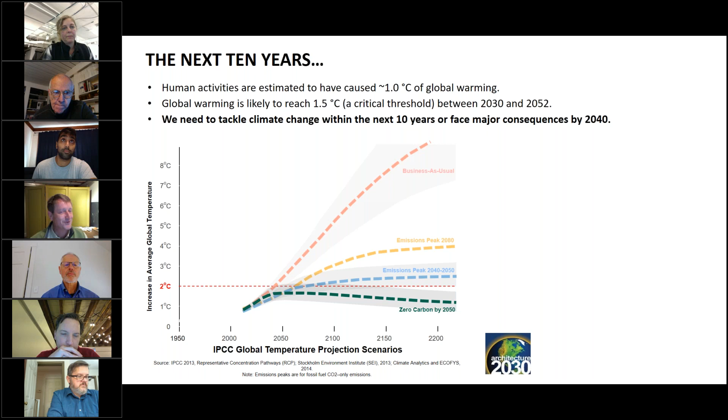So it's important, and I think too, just what the AIA is doing in general, if you're not paying attention, there has been a huge shift in terms of every aspect of the AIA now being about trying to support this big design problem, which is really being part of the solution for climate and carbon reduction and creating a sustainable, healthy, equitable world together.

So just a call out to the AIA—I'm very pleased to be an FAIA in my case, but just absolutely, when an organization makes such a big shift for such importance, anyway, I'm just hats off to that effort, and all of us should support them.

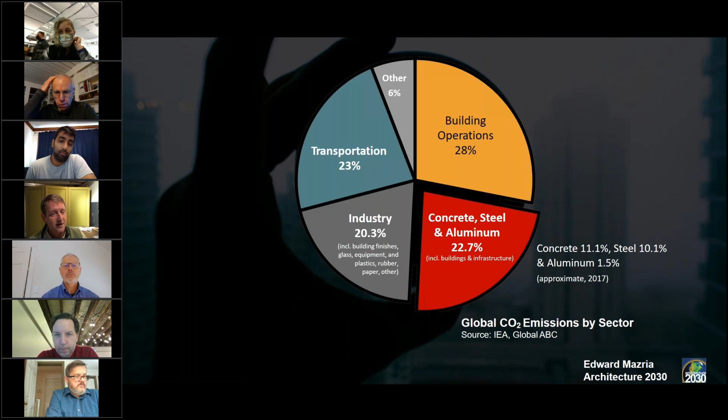So why are they doing that? Obviously buildings, we know the impact on the environment, but today it's trying to shift towards mass timber. We know there are materials out there that we're using more often and too much of, and are we balancing the quantities? When you start really drilling into the CO2 emissions versus maybe energy—we used to always think about the energy performance of buildings, but when we start bringing in CO2 emissions, it really drills into this topic of materials.

And so I think we're getting better. I know we're getting better on the operational carbon, right? We're getting to the point of net positive energy buildings. That's way cool, right? But we're not there yet. We've got a lot of work to do. But the embodied carbon of the materials is now the thing we have to also embrace.

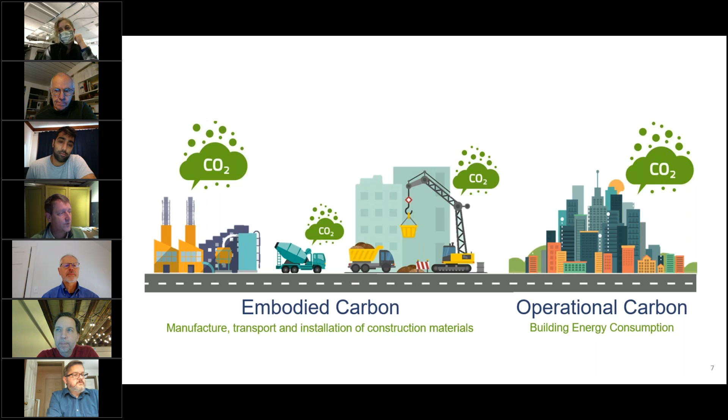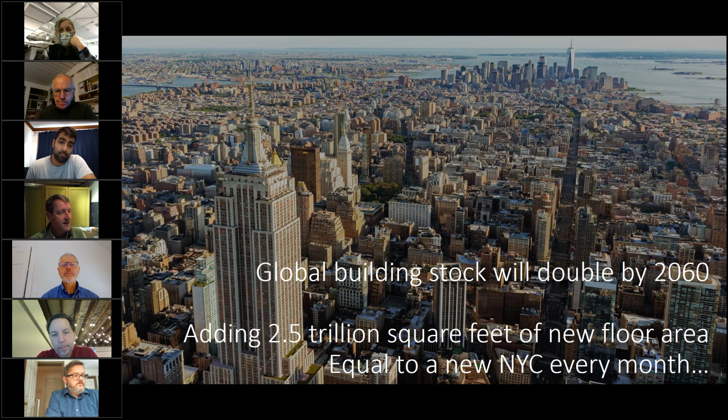So we can't let go of operational carbon—we have to do both. It really comes into where are the materials coming from, how are they manufactured, and are we being smart about how we're using them for our buildings. When you start looking at this global stock advancing, and obviously COVID's throwing us off a little bit on how quick we're going to be building new buildings versus retrofitting, as we look globally and many cities still advancing, we need to pay attention to the embodied carbon.

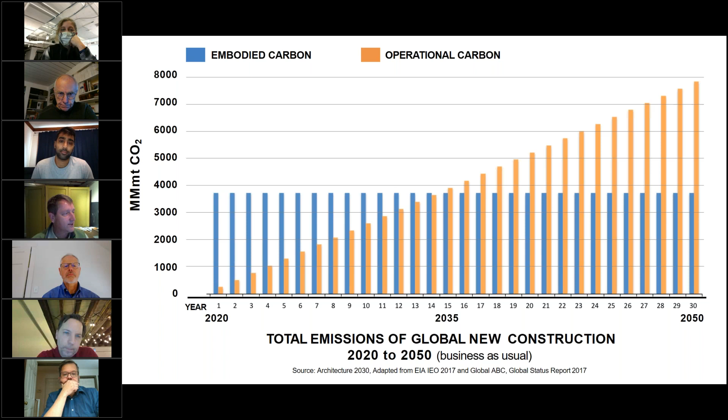This is a graph some of you may have seen before, but it's just showing—left to right along the bottom is years, and on the left vertical are tons of CO2, megatons. When you start taking that many billions of square feet that are being built, it's really—we want to think not just of this operational carbon, which progresses as we get that square footage, billions each year, advancing and impacting in terms of climate energy usage.

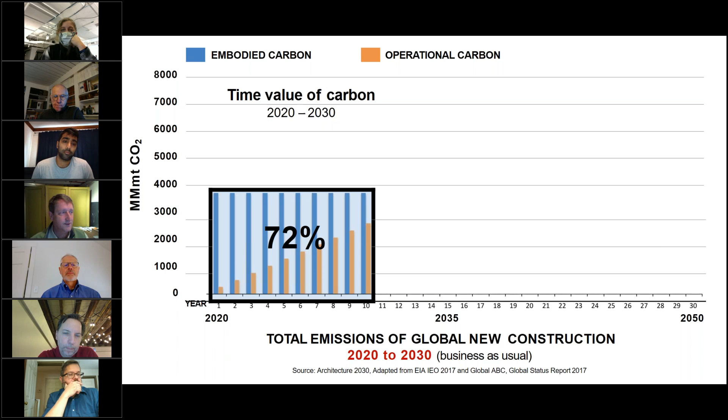It's this other number though, of the decisions we make now about concrete, steel, or in this case of today, trying to prioritize wood as a lower embodied carbon material. That's decisions we make today on every single project, whereas the operational carbon is over the life of the building. So that's a unique difference. And so, look at that pie of that combination of embodied and operational. Yes, let's make our buildings net zero, net positive, but it's also this bigger chunk of the pie.

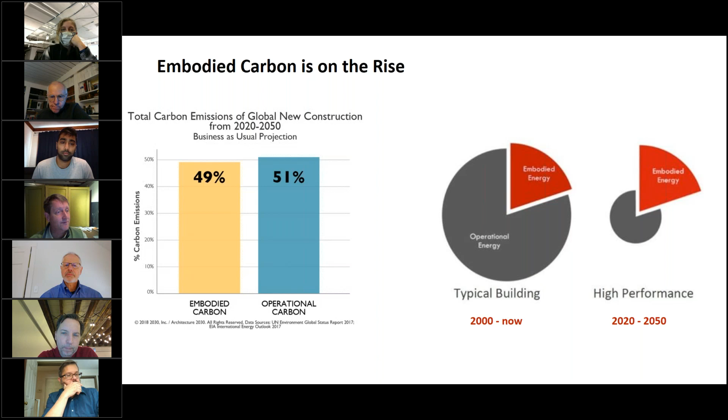Now it exemplifies the importance of embodied energy, embodied carbon. So Thornton Tomasetti, we got this a while ago.

The reality is, the majority of our company are structural engineers, but probably only 50% now, where it used to be all we did. We've been changing and evolving as a company.

We've been almost for 10 years now tracking on an annual basis where the embodied carbon is, and we've been reporting on that for the buildings that get built on an annual basis that Thornton Tomasetti is involved in. We've been taking that data and reporting it back to the AIA for their 2030 initiative, because that's all we really at the time had control of.

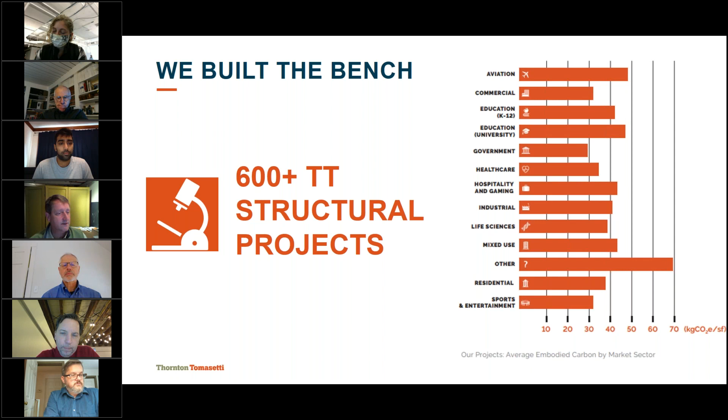We're now rethinking some of that, but we really understand through all the different market sectors we're in where that embodied carbon is. We've been taking that and looking at it, and you can see floors in general when we look at that diversity of the market sector.

It shows how the range obviously depends on the decisions made with the architects and owners about how to improve upon it. And obviously a tall building versus a horizontal building starts dictating where these percentages are.

It's really helpful. We've been able to take this data and share it with the Carbon Leadership Forum, with research institutions like MIT and the University of Washington, and it's helped establish some of the baselines. There's a whole separate talk we could have on embodied carbon with other tools that are out there.

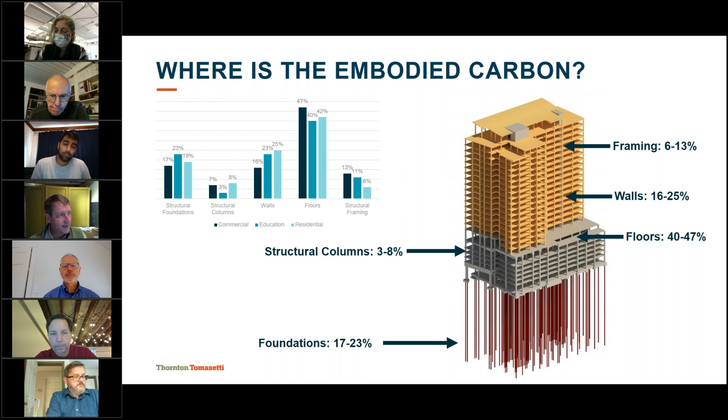We feel this is an area we're actively part of, what the Structural Engineers Commitment is doing in terms of really targeting by 2025 a 40% reduction. And this is just within what's in the control of the structural engineer.

Obviously there's so much more in terms of the facade and the decisions we make on interior finishes that also have embodied carbon. But this is coming around to where we're headed as a company, along with other initiatives.

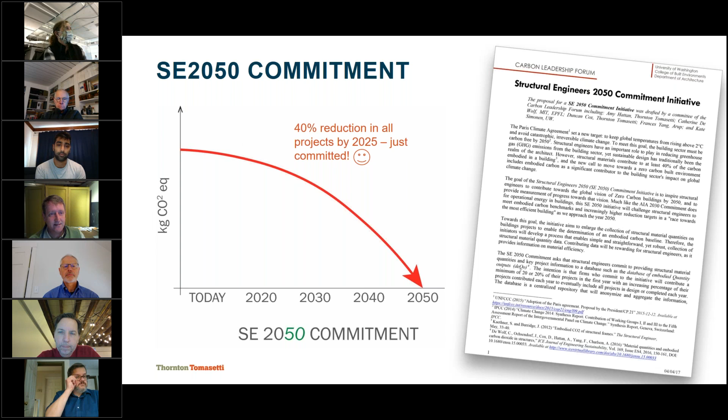Something I think is really unique about Thornton Tomasetti, and it comes back to being a global driver, is that we're taking some of our profit and investing it into tools and techniques to help the industry as well as ourselves. This is a tool we created here called Beacon.

And then Paul's going to touch on this a little bit later, but the Ascent Tower is just coming out of the ground in Milwaukee. That will be the world's largest mass timber building.

There are probably others on the books right now that may beat us out, but at this point we're able to keep on track with this, given everything we know that's going on around the world.

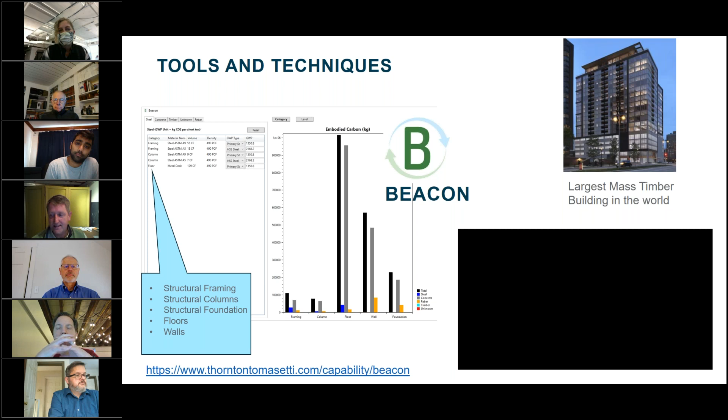So Thornton Tomasetti is taking this data, this analysis, and as we work with architects and owners trying to help make decisions, we're using this data to bring it forward and look at options. And it's not all or nothing.

When we're talking mass timber, maybe it doesn't work for every aspect of the building, and there are ways of bringing in this hybrid approach. Paul will speak a little bit about this, but really trying to get this data at the fingertips early on.

And we know embodied carbon is sometimes harder to put a dollar amount on. I was actually on the phone recently with the Rocky Mountain Institute—they're in the midst of doing a study on the cost of embodied carbon, and that's something they're shooting to get out in the early part of the year. So just a little flag on that one, Kristen, maybe you can be looking out for that.

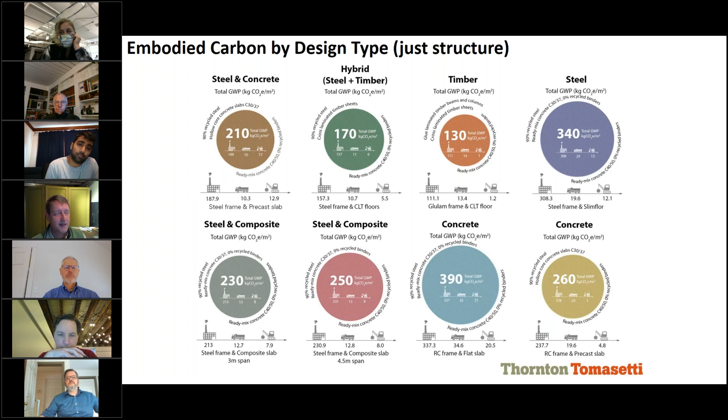But what we are good at talking about is the return on investment of energy. We've been doing that for a long time, but we're having a harder time, only because it's new to talk about embodied carbon—what is the cost and the value? It doesn't always show immediately a return on that investment. Maybe we can talk about this more in the Q&A. But when you look at the ramifications for a region and an industry, it comes down to importance—we have to do it. So how are we going to talk to our clients about decision making? Maybe we can revisit that in the Q&A session.

But ultimately, we are here to talk about mass timber, so Paul is going to take it away from here. I know you've had some other sessions on mass timber, but clearly we are embracing it as absolutely the answer for many projects that haven't necessarily had it as an option in the past. So being able to bring it in early enough when thinking about how you lay out your building and structure—that's what Paul's going to share with you going forward.

Sure, thanks Gunnar. So the question—we want to go back to that slide, I just want to make a couple points there. Yeah, that's great. Clearly we haven't rehearsed this part of it, Gunnar.

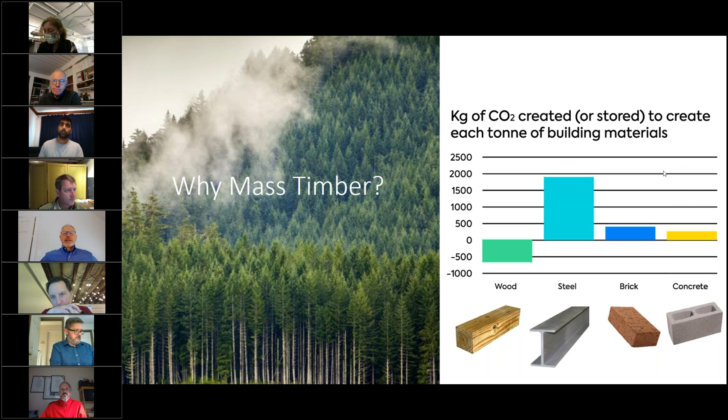Next slide. So when we're talking about mass timber, predominantly people think about CLT, cross-laminated timber slabs. We're also talking about glulam beams and columns. A lot of folks are familiar with glulams—you're taking really good wood in the outer laminations and lesser quality wood in the core, where it's not working as hard.

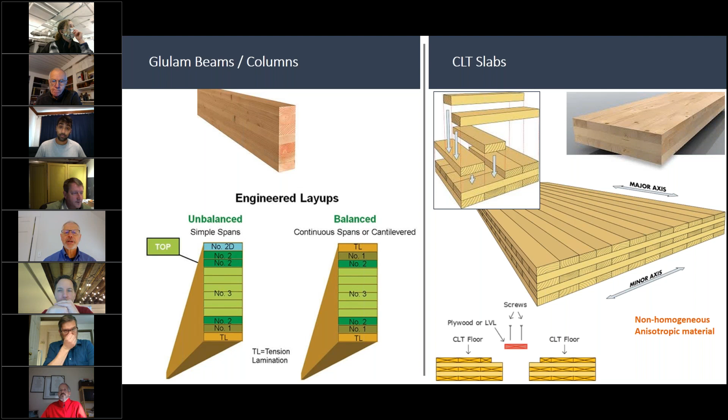With CLTs, it's a similar idea in that you have a major and minor axis, and you put the best wood on the top and bottom laminations in the major axis, also in that middle lamination depending on the buildup. You can put lesser quality wood in the minor axis. So a CLT panel is an anisotropic material, meaning it has different properties in each of the major and minor axes.

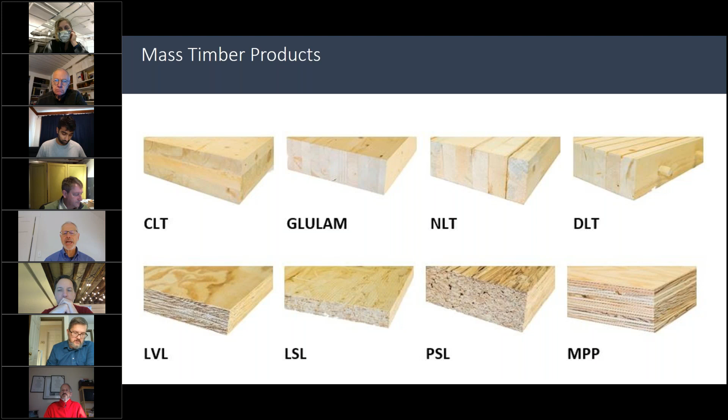Really, these are products that would be considered mass timber. We're going to focus today mainly on CLT, but I want to point out on the lower right, mass plywood panel. At this point it's probably just one manufacturer in the Pacific Northwest—a plywood supplier said, 'I don't want to miss this train,' and started producing these panels equivalent to CLT.

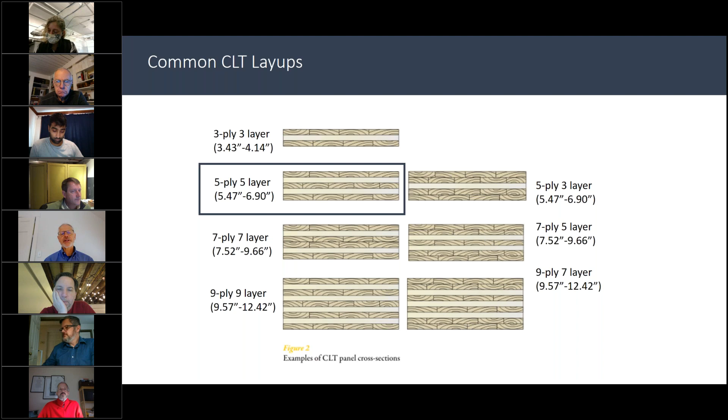So when we talk about CLT, we really want to focus on the 5-ply layer, which is about a 7-inch buildup, because that's the most commonly manufactured product, so you're gaining some cost effectiveness and economy there. We see the 3-ply layer often in wall panels, in bearing wall situations, and potentially in shorter span situations for floors. With the 5-ply is really where we want to try to head our designs. As we lay out structure, we think about this all the time.

So who is producing this CLT and where can we get it? Clearly Pacific Northwest is a big producer. In the east, you have Nordic Structures in northern Quebec. You have a new manufacturer not on this list, Element 5—they're in Ontario and producing a lot. But I want to point out that the Europeans, KLH, Binderholz, and others, are an effective and cost-efficient consideration when we are east of the Mississippi, as many of our projects are. The Europeans produce so much product, and their cost point is somewhat lower than ours.

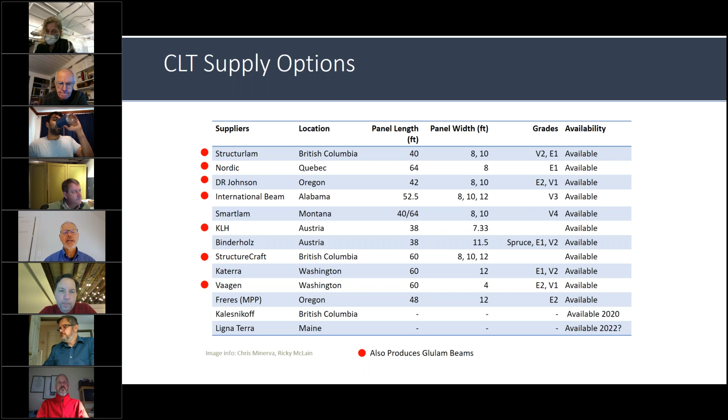And actually, in terms of embodied carbon, shipping this material from Europe on a container is quite economical and sustainable when compared to shipping product by rail or truck from the West Coast or British Columbia. We've done studies on that, projects at Harvard, and it's shown that those products can be supplied sustainably. The red dots indicate those manufacturers that also do glue laminated beams, so if you're looking to match products and finishes, it's important to understand that.

So our approach is, everyone wants to do the big 25-story mass timber building like Ascent Tower, but sometimes we just can't do that. So our philosophy is let's hit singles and doubles and we're going to score some runs.

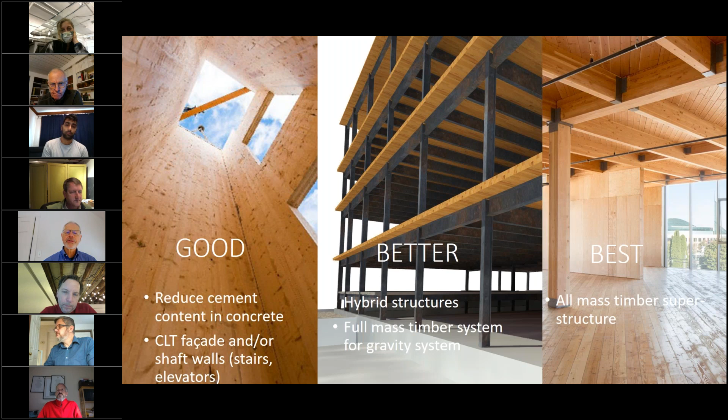We have to get mass timber into the vocabulary of builders and owners, so our approach is to use it wherever we can. The use of stair towers and elevator shafts as an alternative to masonry in low-rise buildings is great. As Gunnar pointed out, the bulk of embodied carbon in a structure is in the floor slab, specifically if you have a steel frame structure with a metal deck and concrete slab. This is a great way to reduce carbon, and a great entry point for owners or contractors who are nervous about going to a whole mass timber building. Taking this hybrid approach is a great way to do that. And then clearly the best approach for so many reasons is to use mass timber throughout your structure.

So what are the systems we're typically looking at? We're looking at beams and columns with slabs spanning in that 20-25 foot range. We're looking at intermediate beam layouts where slabs might be spanning 15 feet. In this case you're trying to increase your column grid to maybe 30 by 30 in the center or on the far right, whereas on the left you're maybe 20 by 25.

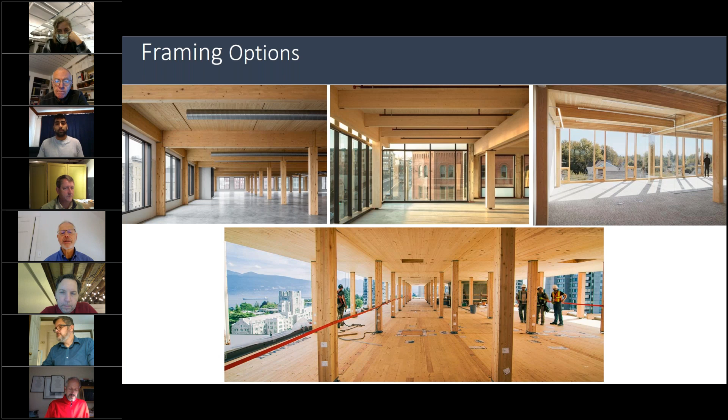And then in the lower photo is a point-supported system. This is at Brock Commons out in British Columbia. There are no drop beams, no girders, point supported, but it does require a tighter column grid of about 10 to 14 feet on center.

So this hybrid approach is a great way to introduce CLT into an otherwise steel building. It goes together really well. Steel erectors are not afraid of it, and again, it's a way to slowly introduce it.

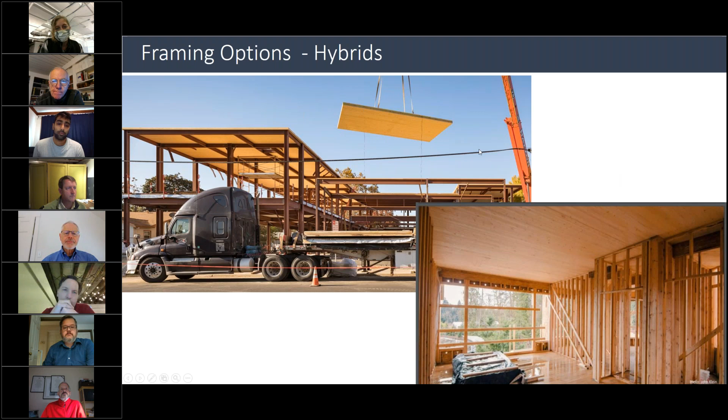So what does the code allow, and where are we heading with it, and are there code restrictions? This is a big movement here.

The 2021 IBC is recognizing mass timber in a whole new way, and they've developed 3 different categories of type 4 heavy timber construction, which will allow us to increase story height and also change the way we approach fire protection. For type C, it can be totally unprotected at 9 stories or 85 feet. Type B, up to 12 stories, requires partial protection, and there are formulas within the code that address percentages of either floor or beams and columns to be protected. And then the highest, type A, 18 stories, is fully protected.

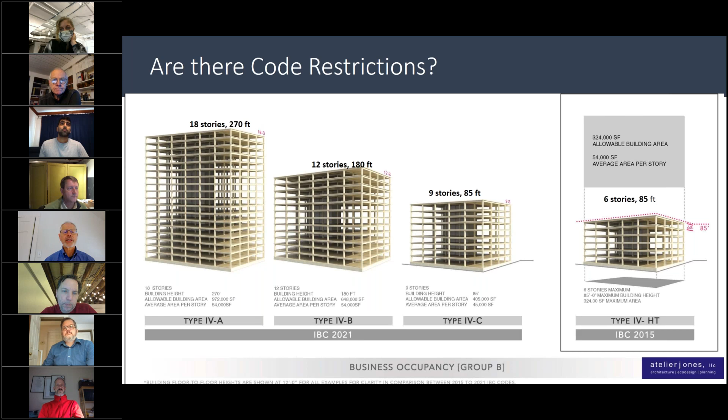That's following a pattern that was developed at Brock Commons, that point-supported flat plate slab project that I showed earlier. That project gained code approval by fully protecting the timber. I believe this will be an intermediate step on a road to exposing more timber as we gain comfort and more information.

So what the code is really trying to do is show equivalency with the type 4B and type 4A mass timber buildings to what are currently 1A and 1B non-combustible buildings. So you're getting parity in terms of the fire resistance rating and areas essentially.

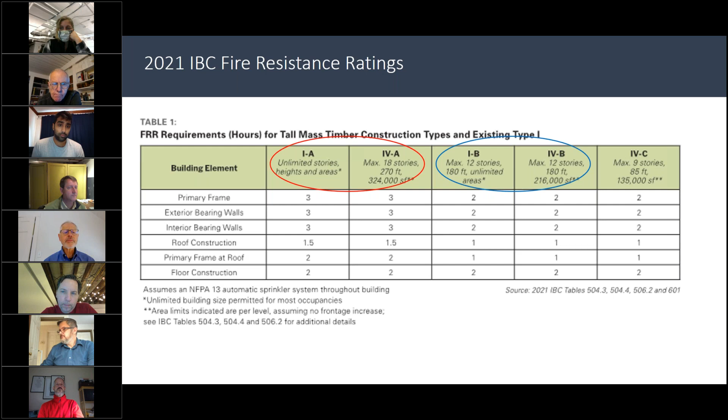So wood's fire resistance is really developed through char. The exterior surface of the wood heats up in a fire.

The char layer develops and really keeps the remainder of the wood fairly cool. The fire is usually a result of contents burning, and once the contents are extinguished, the mass timber self-extinguishes as well.

The fire is really governed by two things: the level of content, and the amount of ventilation or fenestration in the wall system. Assuming the same contents in a compartment, more ventilation means the fire burns hotter and quicker, but extinguishes much quicker as well. With less ventilation, the fire reaches essentially the same temperatures, but it takes a while, and that fire might burn for an hour and a half, two hours.

So the ratings that we achieve are based on the test data that we've developed.

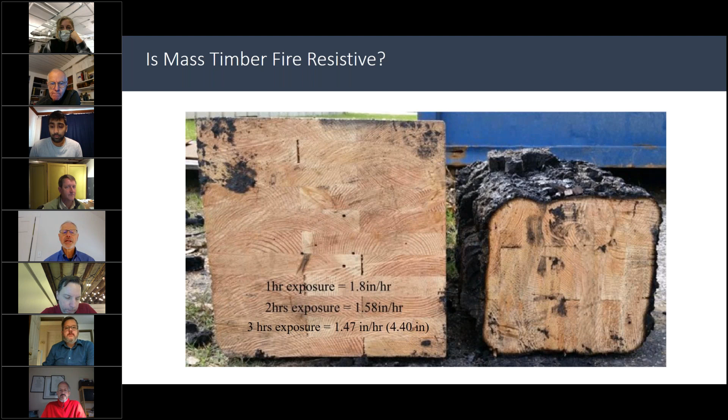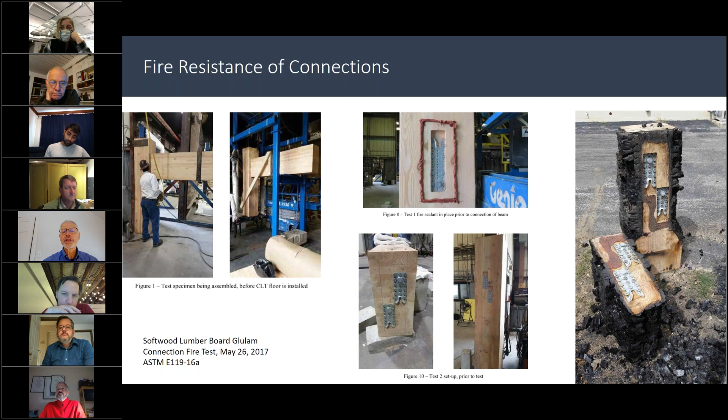That test data includes looking at performance of the timber, but it also includes protection of the connectors. In some cases we're bearing wood to wood and don't have steel connectors. But anywhere we do have a steel connector, a hidden, concealed connection, we have to protect it, in two ways: with fire stopping and with locating that connector within the char layer of the wood-to-wood connection.

One of the benefits of the new code as it pertains to mass timber and fire is how they deal with concealed spaces. Current code for heavy timber would require sprinklering of concealed space in many cases. Here, depending on the height and type of construction, in low rise you may not require any protection, because that CLT, as I said, many manufacturers now come with a 2-hour rating.

But if you have a drop ceiling, you need to protect that CLT with one layer of type X drywall. And likewise in Type A and B, the taller wood structures, you need to protect that CLT with an extra layer, but there's no sprinkler requirement. So it's quite an add, if you will, for fire protection. It's a positive step.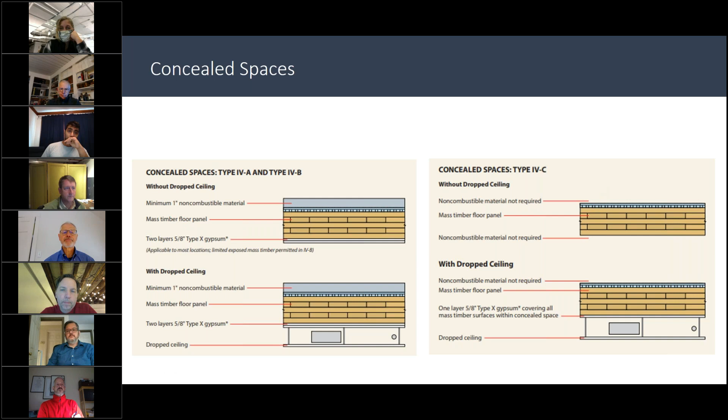In terms of other considerations, fire and acoustics used to be more the purview of the architect, but as we move into mass timber it really requires closer collaboration between the structural engineer and the architectural firm to determine the best system to achieve the ratings you need.

We typically see an isolation mat and then some type of topping, maybe gypcrete or concrete, that could be from 1.5 to maybe 2 inches. That helps with the sound. You could go to a dry system as well, increasing the isolation mat and using tile, or a completely dry system with wood where you're putting a sleeper system essentially on top.

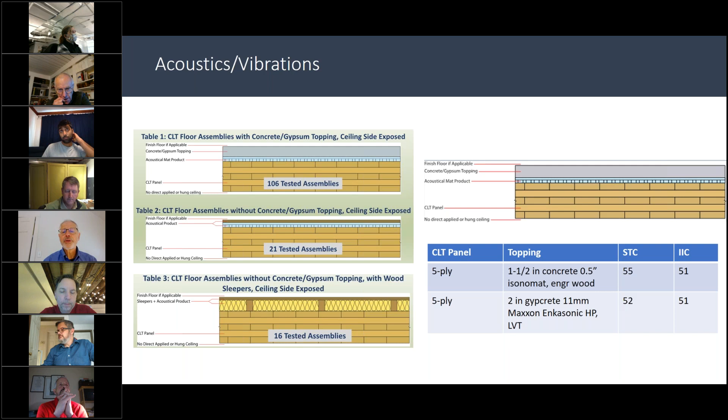These are considerations for discussion with the contractor, because some projects just don't want wet construction after they've set some of the lower levels in place, depending on whether they're doing top down or bottom up in terms of finishing.

So where are we going with timber? Thornton Tomasetti was involved with Perkins and Will and University of Cambridge on an 80-story research project several years back, looking at how we could go taller with timber. We used the diagrid system and made the most efficient use of the timber.

Think about honeycombs and the strength they have. This is really work that was instrumental in setting us up for the Ascent project.

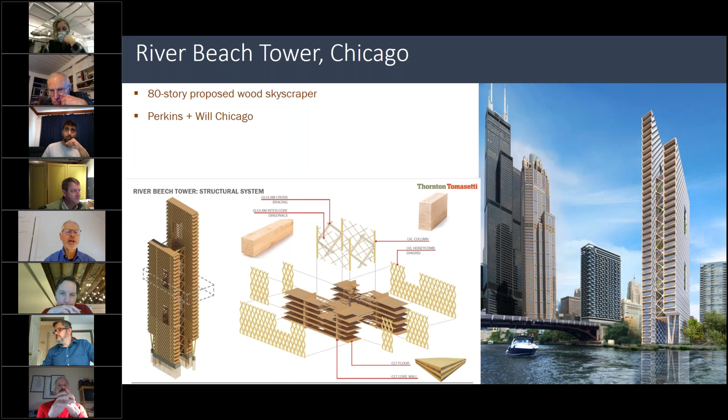So Ascent, as Gunnar mentioned, is a 25-story mass timber building. It's currently the tallest in the world. It's under construction—19 stories of wood over 6 stories of post-tension concrete parking garage.

In terms of how they achieved code compliance, Type 1A construction is usually what we would look at for a building of this size. They explored that as a code path using performance-based criteria, and did a lot of testing on the timbers. They did the first 3-hour fire test on timber columns, and showed they were sufficient to carry the load that was calculated. They came up with the section properties needed, did the calcs, and then tested it. That was really a positive development for the industry.

But in the end, what they decided in discussions with code officials was to use Type 4 construction with an exemption for height, but they did provide the fire resistance ratings of a Type 1A construction. There were other aspects too, in terms of firefighting capability during construction, particularly additional standpipes and temporary fire suppression systems. It's most vulnerable during construction, as you can imagine, before all the systems are in place.

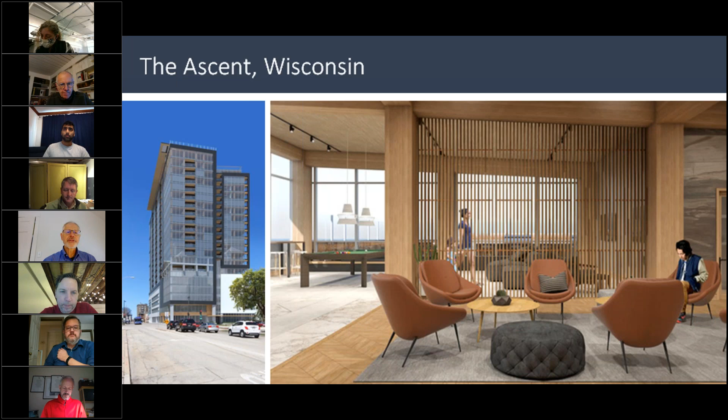So what we've been doing is looking at different mass timber systems to try to understand the efficiency and where efficiency lies. Mass timber pricing, when you're looking at construction costs, is really pretty much a direct correlation to the volume of wood, cubic inches per square foot.

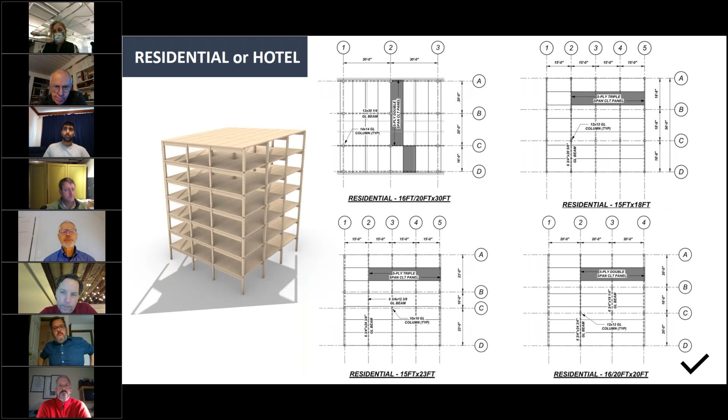So we've studied different structural systems for residential or hotels. We found that if you use a 16-20-20 grid, meaning the CLT runs the length of the building over the corridor, and you space your columns out at the entry, bathroom, or kitchen locations in dormitories, hotels, or apartments, this creates probably the most efficient layout using 1,125 cubic inches per square foot. It gives you great floor to floor height and cuts down clearly on costs, which is what we're trying to understand.

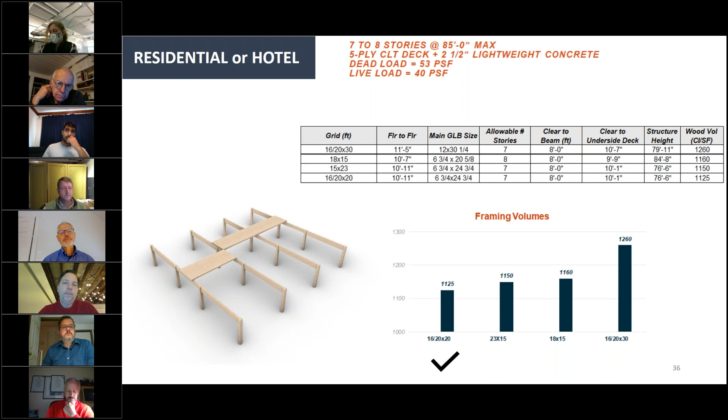We've done similar studies for office layout, and while the traditional 30 by 30 office can be achieved, what we find is that a grid of about 20 by 25, with the CLT spanning 20 feet, is sort of the sweet spot.

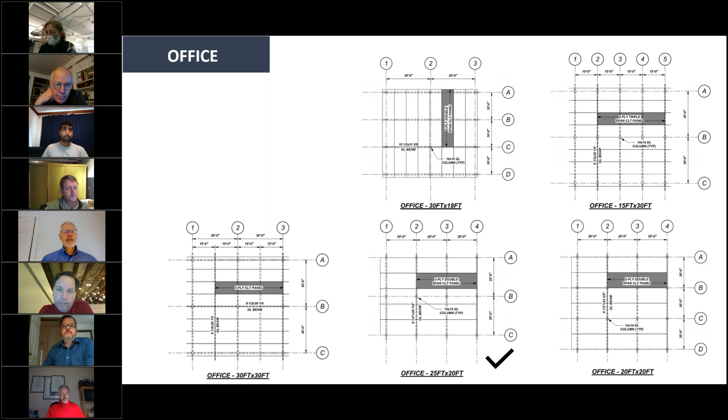That's because while it has a little larger volume of wood than the 20 by 20 grid, it's seemingly the best value in terms of space and how tenants can really use it. It's not to say we can't do a 30 by 30, or for a lab building a 20 by 40 or 30 by 40 - it's just that it comes with additional cost. There are ways to address that.

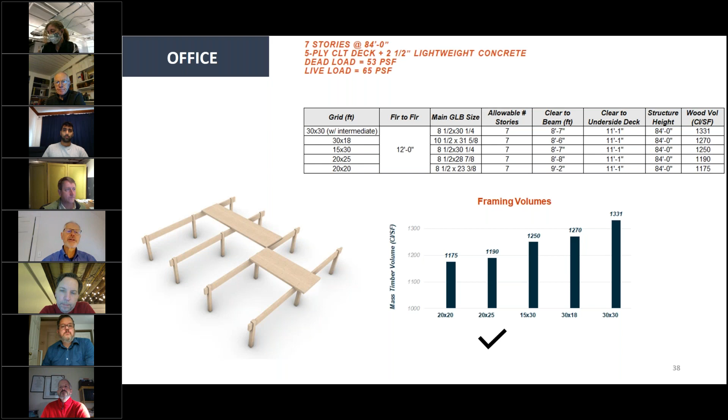We can use composite construction, meaning we attach screws into the top of the CLT or other fasteners, cast a composite with the concrete deck, and obtain longer spans. But in doing that, we're still buying more wood to carry the additional concrete weight required. So if you can set your grid to 20 by 25 in an office building, you're going to achieve the greatest efficiency, and in turn have the greatest likelihood of a successful outcome.

So a couple examples. This is a project here in Portland - a hybrid. We tried to do a full CLT mass timber building. Cost didn't allow it, but we used a glulam frame and a potlatch deck on the roof, all considered mass timber. The infill floor framing you see in the plan view is pretty squirrely - a little bit of geometry going on. So we compromised, and they put in wood trusses with a ceiling in that space.

But again, the idea is to hit singles and doubles where we can, get it into these buildings, get people familiar with it. This was directed by an owner who wanted to retain employees - they were having trouble retaining staff and wanted a nicer work environment, and I think they've achieved that.

Here's a project we're working on right now, the University of Maine - a classroom and lab building. The direction was they wanted us to design this in both steel and timber, so we had two competing designs side by side. The contractor, Consigli Construction, priced out both scenarios. When we went timber, we went all in - timber shear walls, cores, timber facade, the whole works. This project costed out at $3.30 more per square foot for the mass timber, which is $250,000 on a $54 million project.

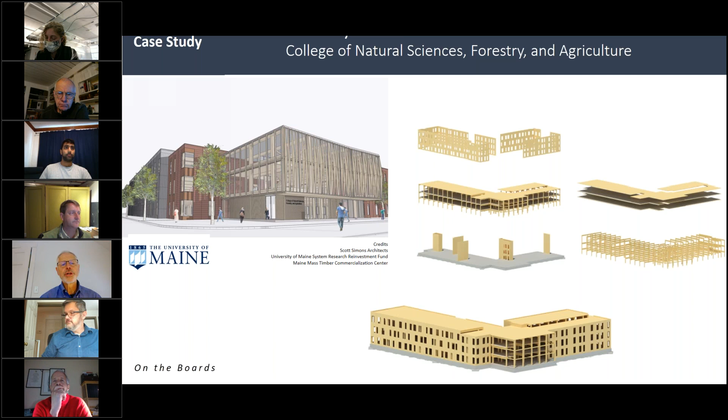So really, at this stage - this went to early DD - it's pretty good, and pretty competitive. We took it further in terms of the data, but it's really very competitive. We approached this with those situations in mind that I talked about: how to reduce the volume of wood, how to make it efficient, and we were able to do that.

So the other great part about that is we reduced the CO2 and the global warming potential by almost 40% by going to a full timber building.

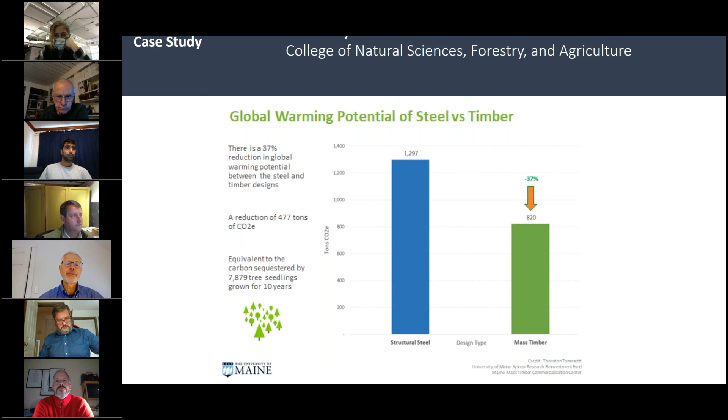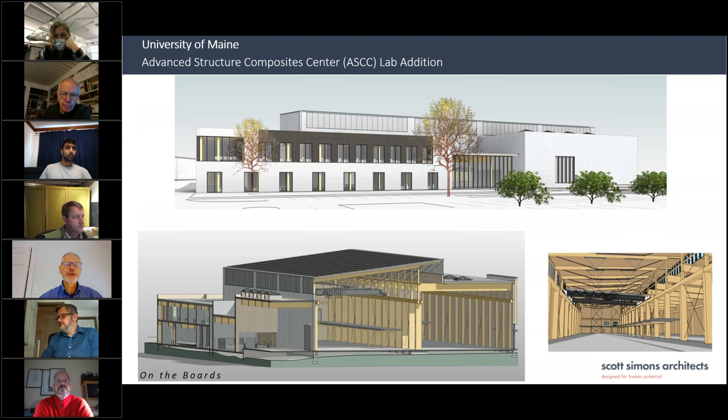This is another project we're working on, also at the University of Maine. They are really pushing wood for their buildings. The State of Maine has probably the largest wood reserve in the country, and we are trying to get a mass timber manufacturing plant here desperately. The state has been funding a lot of studies and concept designs to get there.

This is a 75,000 square foot, 300-foot long laboratory building at the University of Maine, with 70-foot and 60-foot clear spans and four 15-ton bridge cranes, two in each building. It's a completely wood-framed building, except the underslung roof trusses do use some steel tie rods.

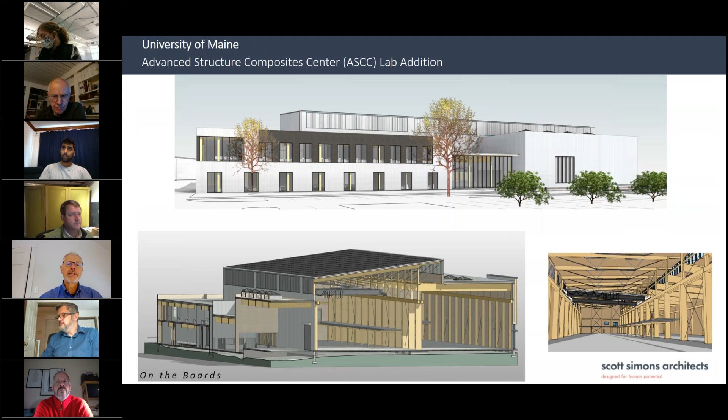This is another project, Bigelow Labs Ocean Sciences. It's an education center on the coast of Maine.

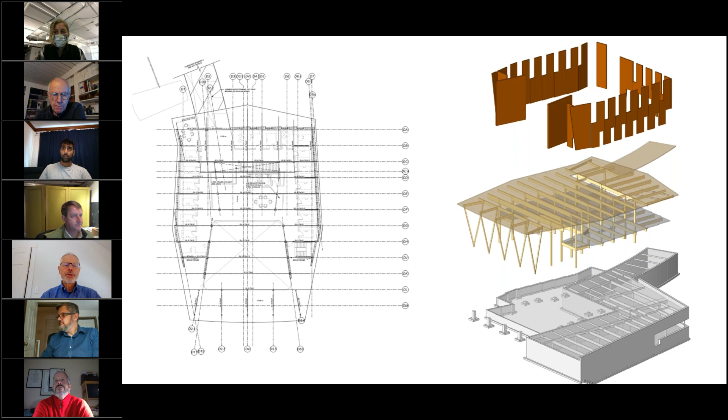We looked at this project. The direction was given to use mass timber as much as possible. It is a large, long-span structure. Laboratories at the lower level were framed in steel and concrete, but the interest was in the offices and the education center to use wood.

The facade was wood. We also designed this as a steel alternative. Again, costing was essential, and unfortunately this did not have as good an outcome.

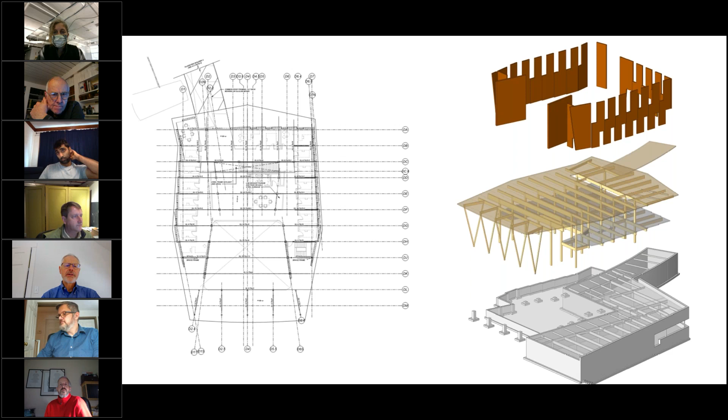Didn't have as good an outcome from a cost perspective, but this is a little shot. We did use CLT on the exterior walls. The window pattern was such that we made a kind of Z-shaped panel that was connected. We evaluated it for lateral loads and vertical loads, and showed that it all could work.

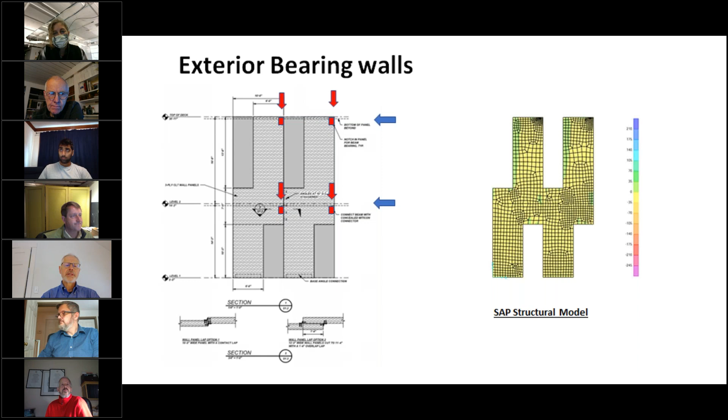We showed it all could work, but the bottom line is that project came in about 4% higher using mass timber because of the long spans, and the owner just didn't have the wherewithal to go that direction. That project was put on hold due to COVID, so it may resurface with extra money, and that's our hope.

So a couple of extra slides here, and we'll be done. To influence success on these timber projects, it's really important that we get the right team in place, from consultants all the way down through the contractor. You have to have a team that's dedicated to making this work, not finding ways that it won't work, but finding ways to make it work.

I think the best thing is to get strategies early on to reduce cost. That talks about really looking at that structural system, the bay size, the layout, thinking about mechanical systems and how they're going to be run, through structure or below structure, and really investing in a lot of upfront planning. The beauty of mass timber is that it's a pre-manufactured product, and you gain efficiency by having all these products pre-manufactured and delivered with penetrations, daps, and notches everywhere you need them to be.

Highly precise material, to the millimeter. So it's really a wonderful product.

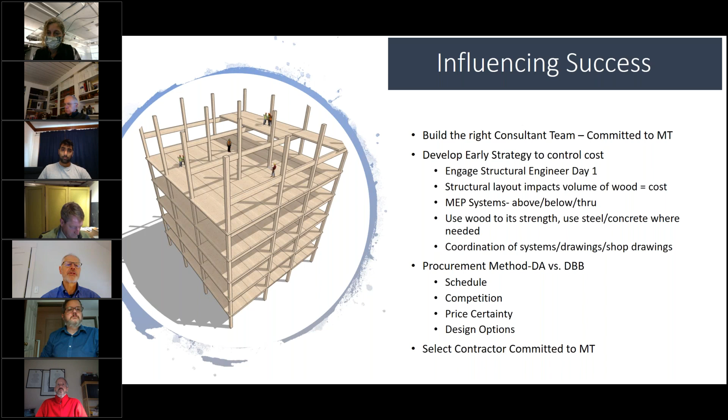The other thing to talk about is how do you procure the material? Is it a design assist or a design-bid-build approach? Each has their benefits, positive and negative. A lot of folks are going to design assist, but where you gain maybe a schedule benefit, you can sometimes sacrifice competitive costing. So we feel we can design a building that can accommodate most manufacturers and create some competition in the marketplace.

Again, the reason we want to use it is it's very quick to go together. It's a lighter material, you use smaller crews, you can use carpentry crews, and especially in urban settings there's a lot less noise. We find that general conditions are reduced.

The Ascent Tower project was really looking at reducing their construction time by almost 4 to 6 months, and that's real money. I think we have to always be aware of that. It's a lighter structure, so it can reduce foundation loads and also lateral loads due to seismic.

It's also a great product to use if you're thinking of a vertical expansion on an existing building. When we get into those, we do have to do a code upgrade for lateral systems, but the lighter the overbuild, the better it is in terms of reducing costs. So we try to avoid vertical expansions because of that seismic concern, but sometimes it's the right solution.

I think here's an area that most contractors are ignoring, and that affects the price considerably, along with speed of construction: exposing this timber reduces a lot of the cost of finishes, painting, and waste. It's important to find the right contractor on the project who understands these things and builds this into the cost.